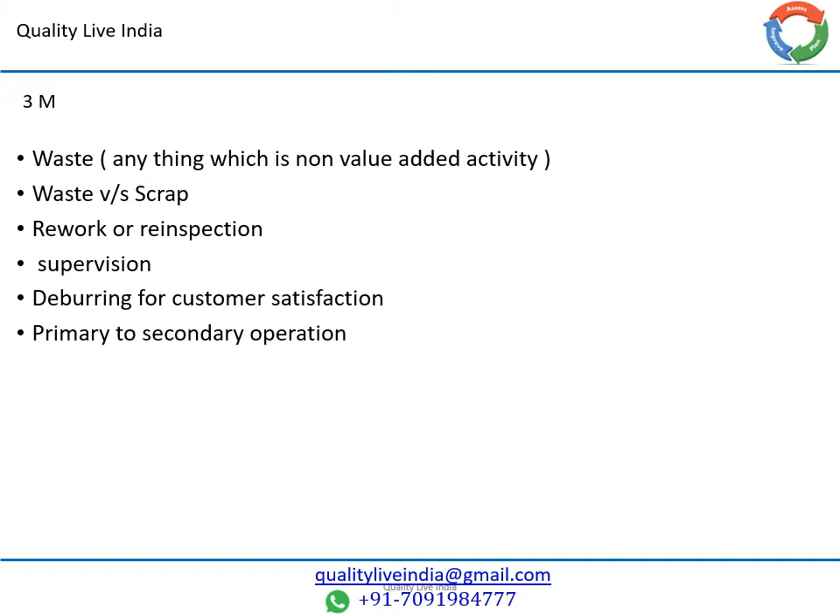And primary and secondary operation is a waste. We will learn all these things in detail in coming slides. At a glance, we can understand this is completely waste, which the customer is not paying us for. All these activities are waste. This is called Muda.

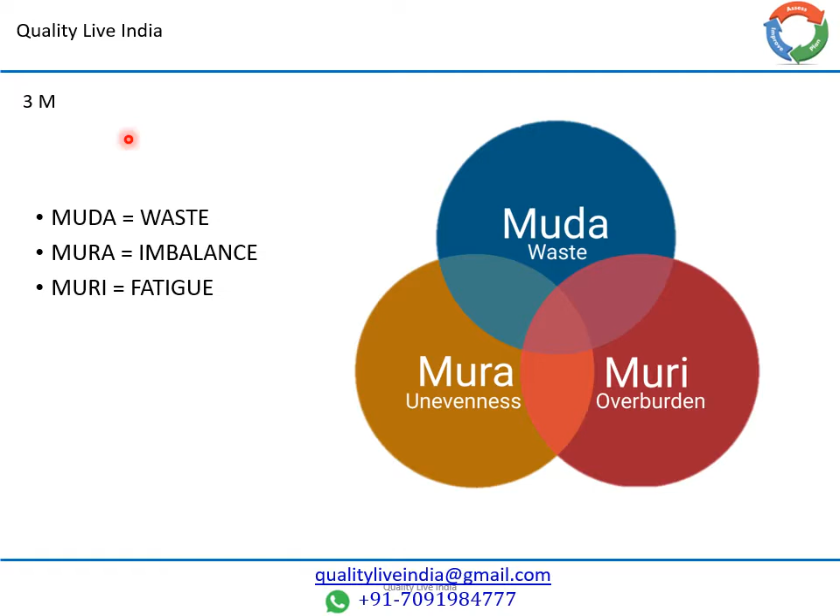3M is a Japanese concept. 3M stands for Muda, Mura, and Muri. Muda is the Japanese name, and the English name is waste. Second M is Mura, that is imbalance, and third M is Muri, fatigue. We will learn in detail about Muda, waste.

Friends, there are 7 types of wastes. We will see in detail in coming slides. These 7 types of wastage or Muda are: number 1, Muda of overproduction. Number 2 is Muda of stocks, like inventories. We can understand it as inventory. This is also a Muda.

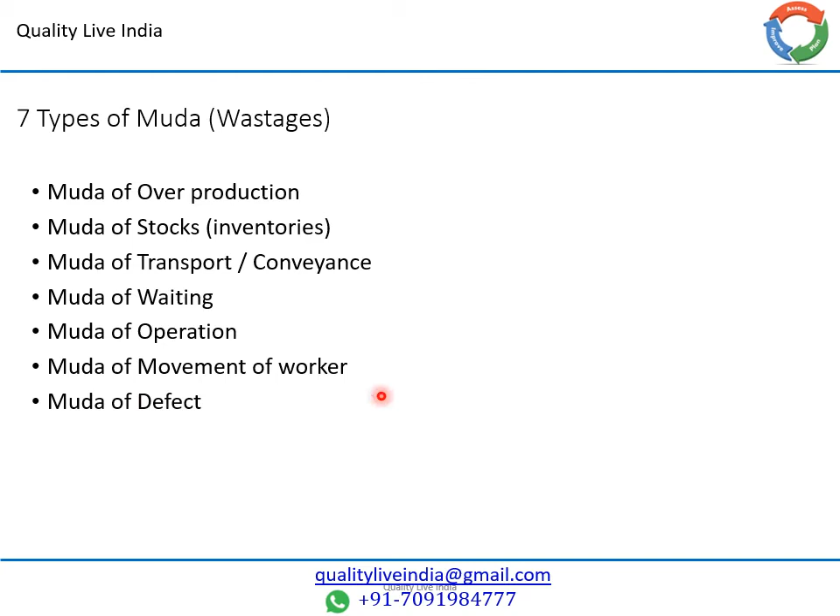Muda of transport, Muda of waiting, and Muda of operation. These all are wastage. We will learn in detail in coming slides. Muda of movement of workers, Muda of defects.

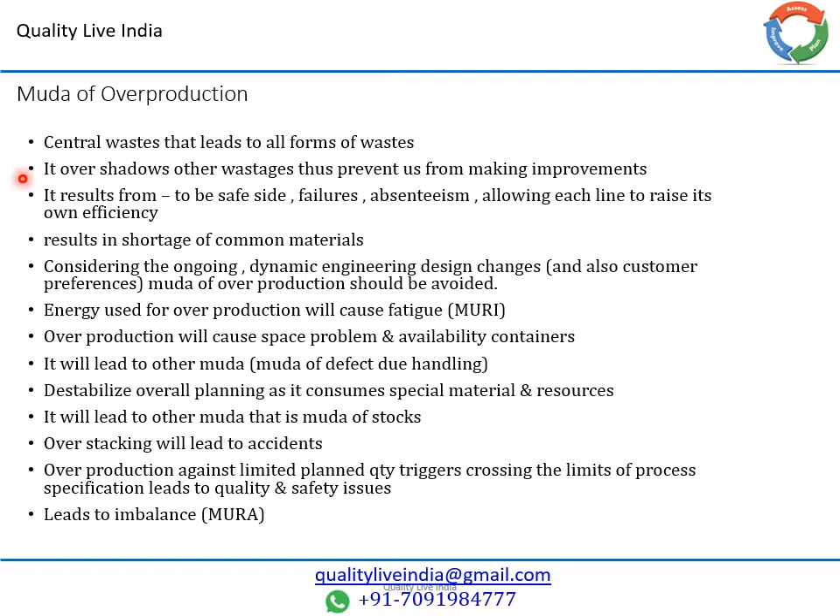Friends, now we will learn in detail about Muda of overproduction. The Muda of overproduction is central to the other wastage. It leads to the other wastage because if there is overproduction, then it creates stocks. This is the second type of wastage.

If we do overproduction and suppose any defect is there, the defect quantity will be more just because of overproduction. So this is another type of wastage. So we should avoid overproduction. We should produce product as per the customer requirement, as per the schedule only.

The reason for overproduction is we need to be on the safe side, to avoid failures like machine failure, material failure, manpower absenteeism. And we want to show our own efficiency, that we can produce more product. So this is the reason for overproduction.

Overproduction creates a problem for availability of containers and a problem for space. It leads to other mudas like defects. If more is produced, then handling is more. If handling is more, then there is a chance defects will be more. Overstacking from this overproduction may lead to accidents.

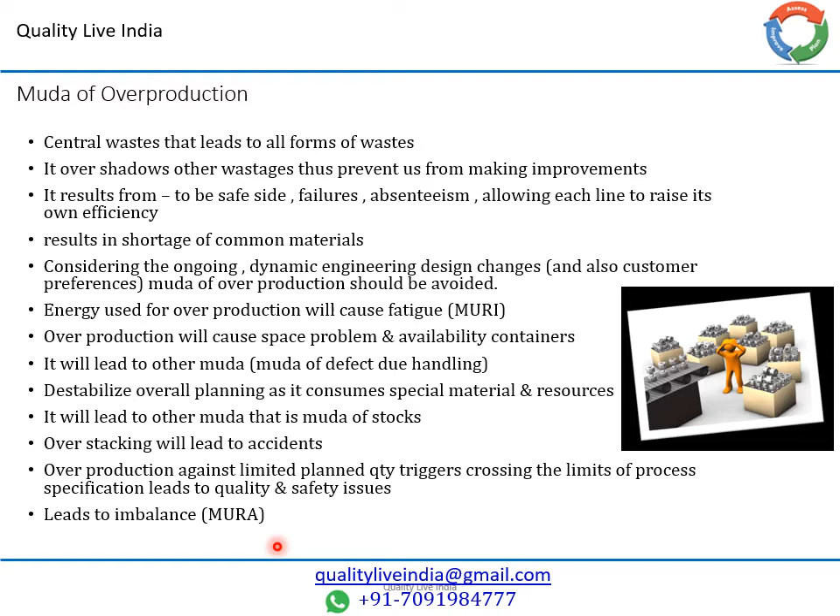Friends, the second wastage is Muda of stock. If there is more stock, it will take more space, more inventory. This is the result of overproduction. The reason for these stocks is laziness, and if stock is more, it will kill your creativity because improvement is not required for customer satisfaction.

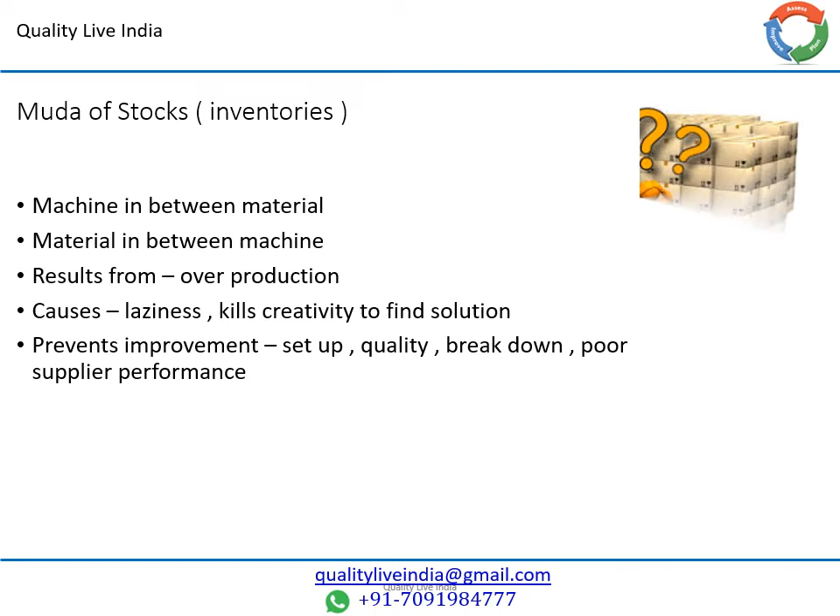You easily fulfill delivery of product on time because you have inventory. So it just kills your creativity to find the solution. This inventory prevents improvement like setup improvement, quality improvement, single setup, more quality, breakdown, etc. So inventory is also a very dangerous muda for any organization.

The third one is muda of transport, moving parts to intermediate locations and not to the final destination, like an isolated island. So minimum transportation, minimum conveyance leads to good quality and good value adding activity, because if transportation is reduced, the chances of damage and deterioration of the part are reduced.

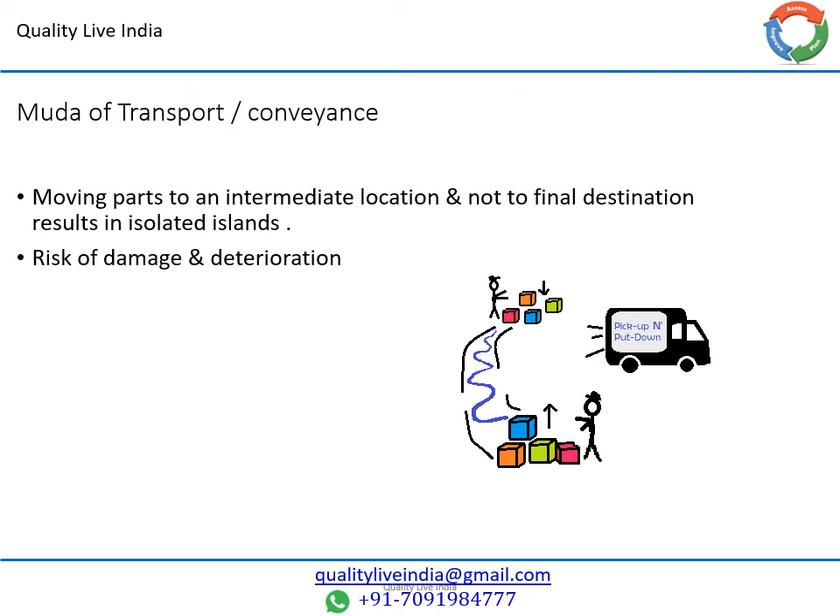So value stream mapping is a very important tool for avoiding this type of muda. With value stream mapping we can understand the transportation in between, from the supplier to dispatch, and if we do value stream mapping properly we can reduce the transportation, reduce the muda of transportation, and reduce the muda of defects, transportation damage and deterioration of the product.

Friends, next muda is muda of waiting. This is a very common muda in any industry because waiting is more. Always waiting is very high: the operator is waiting, material is waiting. Waiting time does not give any value added activity. They just stand idle. So if we want to improve efficiency of the organization, we need to avoid, eliminate or maximally reduce the muda of waiting.

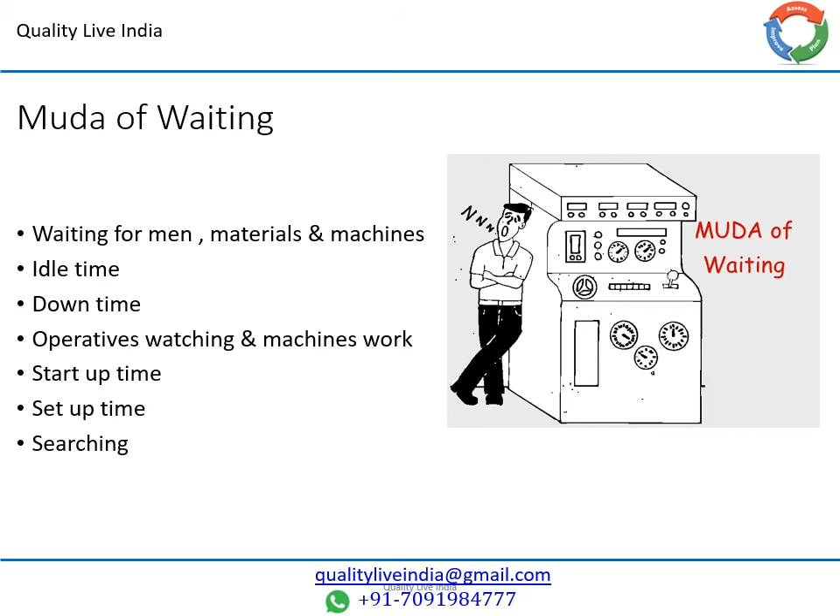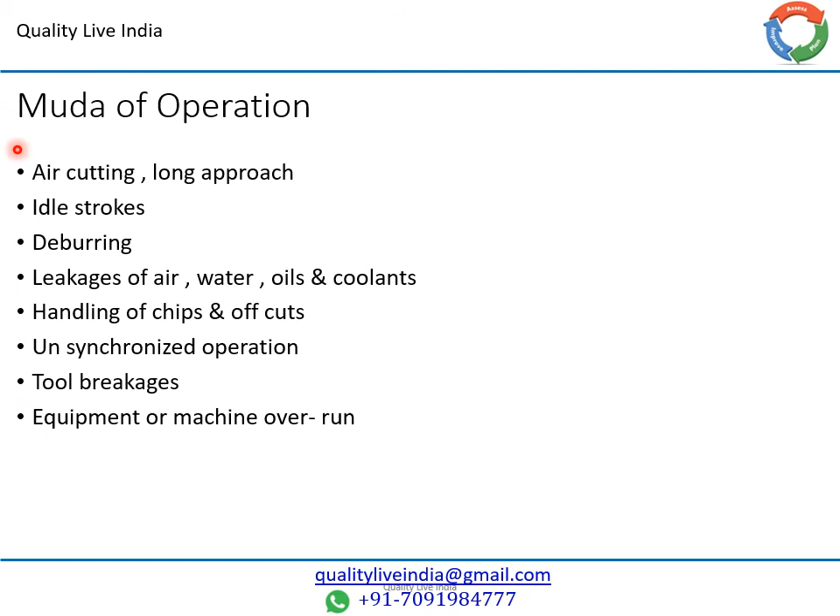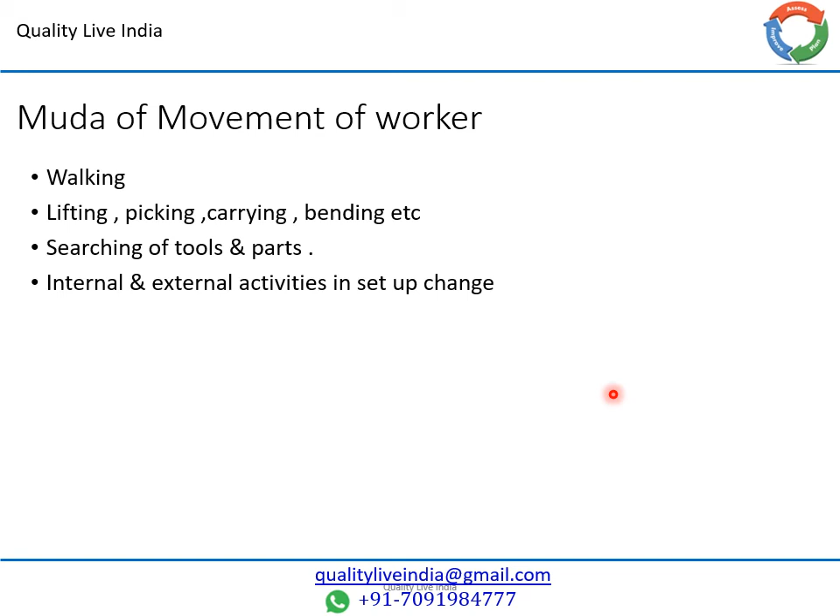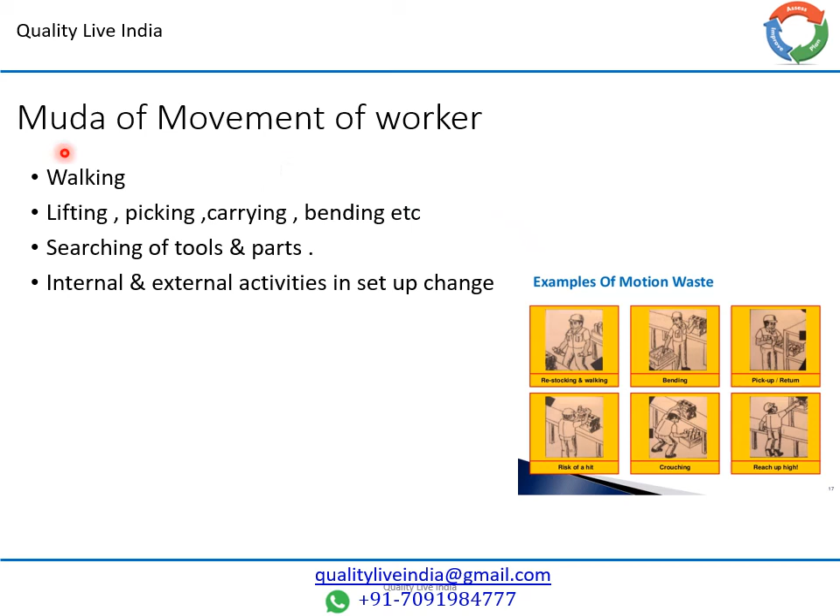Friends, next is muda of movement of worker. The movement of worker is how he moves in his working area, like walking, lifting, picking, carrying, bending. If this is not done properly and ergonomically, it will create fatigue to the operator. Searching of tools and parts, internal and external activity in setup. Internal and external activity in setup we can understand in detail in single minute exchange of die. This is the best tool to reduce the setup time to single minutes. So these are also wastage of movement of worker.

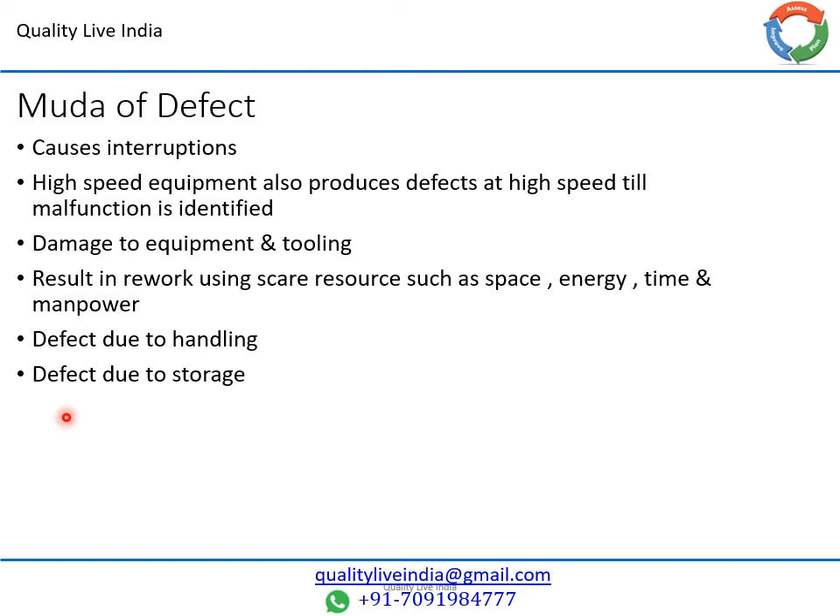Friends, last waste is muda of defect. Muda of defect is defects generated in the product, which is not useful for the customer. It does not fulfill the quality requirement. So all the cost of the process, cost of the manufacturing, is waste. So defect is very dangerous for any organization. We should try for first time okay product, and produce a defect free process and defect free product the first time.

Friends, if a defect is generated, then we have two options: either we rework the product or scrap it. In both cases, the customer will not pay us money, which leads to a negative impact on our organization. So defects should be avoided, and our process should be strengthened so that products are produced defect free.